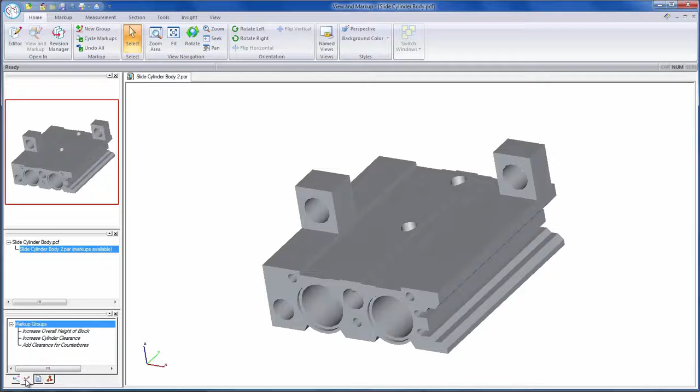Design intent is the intelligence we as designers build into our CAD models so that they'll change predictably. The issue is, in a history-based CAD system, nobody knows what the intent is other than the original designer. This could prove to be problematic if the designer is no longer available or doesn't remember how the part was put together. To illustrate the problem, we've been sent some markups to make to this old part.

For our first change, we need to add some extra material to the slide in order to create additional clearance between features. We have instruction to change our slide body to an overall height of 31mm. The second change is to increase wall thickness between the cylinder slides and the cutout to 4mm, as we're seeing some problems with deformation. And finally, we need to add at least 2mm of clearance between these counterbores, as our new manufacturer is reporting a blow-through risk.

First, we'll attempt to make these changes like you would with most any other CAD system, using a history-based approach. Then, we'll make exactly the same changes using synchronous technology. So first, history-based, and to help compare, let's set a timer going in the top right.

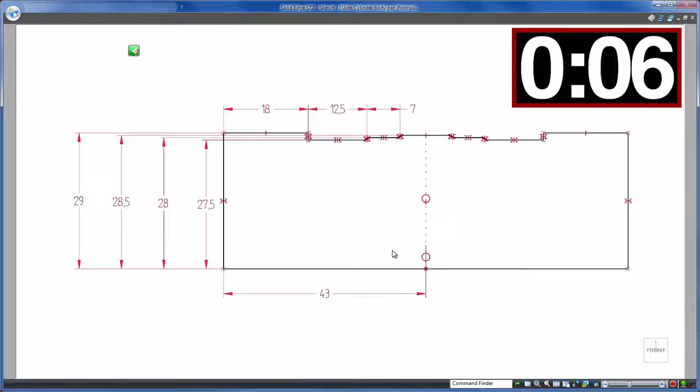So for the first edit, we click on the model to edit the sketch of the highlighted feature, assuming this is the correct feature. Luckily it is, and we're also lucky that we have a fully defined sketch with a dimension of the geometry that we need to change. We'll change this to 31mm as required, the sketch is updated as we'd expect, and then rebuild the model.

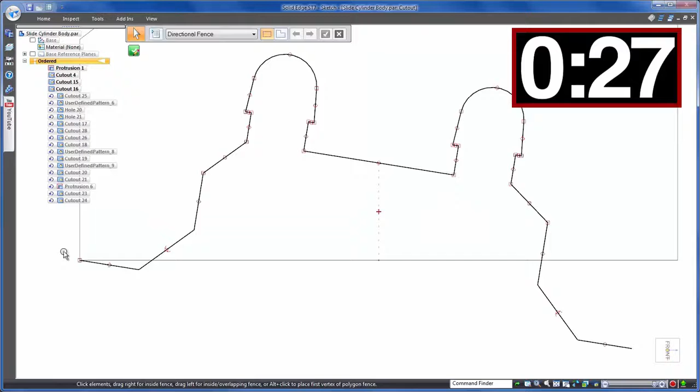We have a problem. Due to inappropriate design intent, this cut on the right has shifted, so we need to go in and fix this by editing the sketch relationships. Only a minor issue there to resolve, 34 seconds of editing, but let's do the same revision using synchronous technology.

Timer restarted in the top right, and for this same change, all we need to do is place the required dimension in 3D, no sketch work in sight. Solid Edge has recognised the design intent of the geometry here. It sees that there are quite a few faces to keep in line.

However, as you can see, we can intervene on the fly if we wish. Solid Edge was right the first time though, and furthermore, notice that we're able to keep the model symmetrical. No issues about fixed origins or coordinate systems, 22 hassle-free seconds.

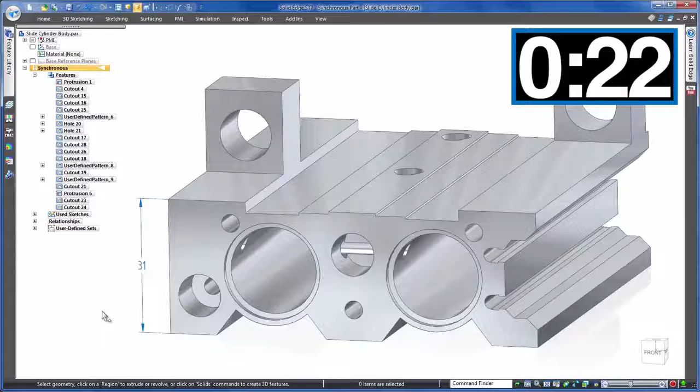Back to history-based for the next change, and before we make any edits, we need to find out how much material we currently have between the cylinder and the cutout. Measuring it finds it to be 2.5mm. We need to make this a total of 4, so we'll add 1.5mm to the radius of the cut.

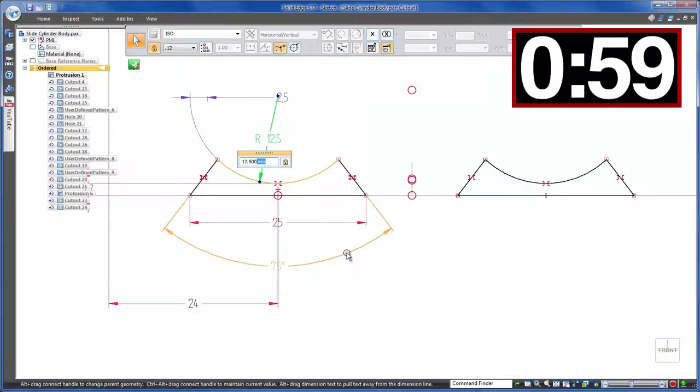Again, we'll go in and edit the sketch of the feature and use Solid Edge's ability to enter equations in the dimension box to simply plus 1.5mm. Rebuild the model and it's clear that the original design intent wasn't set up for this type of change. We now have interference with our slide positioning holes.

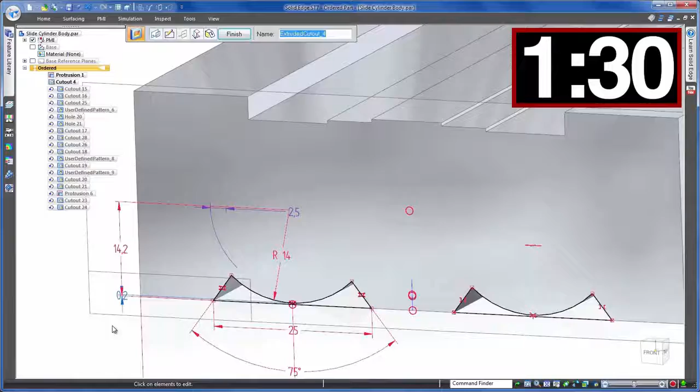So let's undo that change and go back to the sketch to correct the design intent. We'll speed through this to save you falling asleep. Okay, sorted, and we're at 1 minute 34 seconds.

The same change using synchronous technology, and dimensioning the two radii here isn't limited to just taking a measurement. Instead, we can immediately type in the 4mm clearance value required. As for design intent recognition, not only does Solid Edge allow us to add material rather than shifting the cylinder slides up, but it also recognises that we'd want the other side of the model to change too, as it's symmetrical.

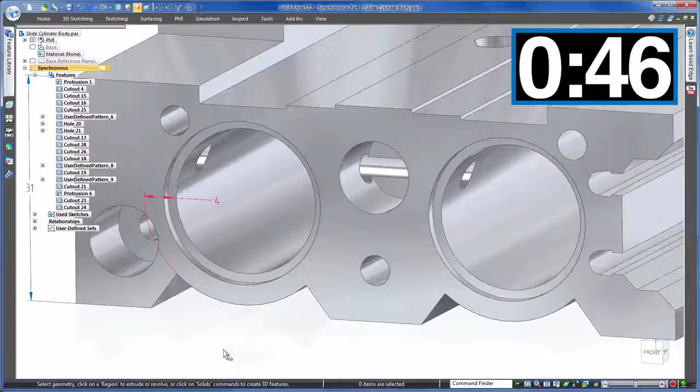Now for our final revision, and back to a history-based approach for the last time. In order to get a better idea of what we're working with, we'll create a section view through the model so that we can get a better understanding of where that blow-through risk is. Okay, here it is. So we'll be editing these two counterbores, and let's take the lower one first.

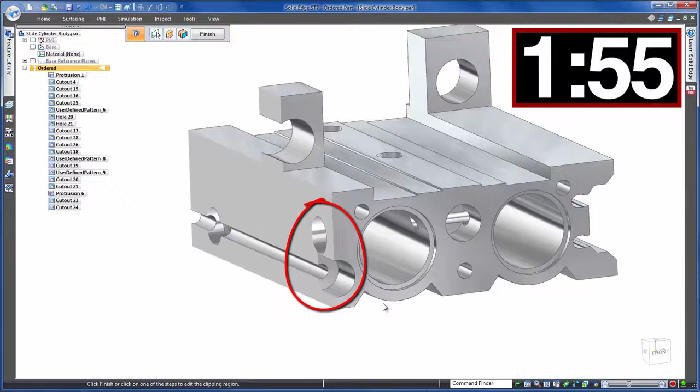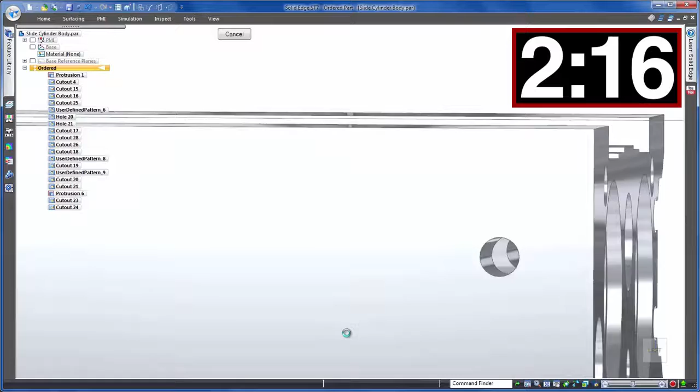We'll go into the sketch and modify the dimension that's controlling its position, subtracting 1mm. Again, we'll use the equation in dimension box method for ease. We need to do the same with the top counterbore to total our required 2mm clearance, but repeating the same steps, notice that this wasn't created in the same way as the previous. Instead, it has two cuts, one concentric to the other.

These sorts of frustrating situations are often run into in history-based modelling. Design intent may not be what you'd naturally expect. It's all down to the original decision and creation. Another fix required.

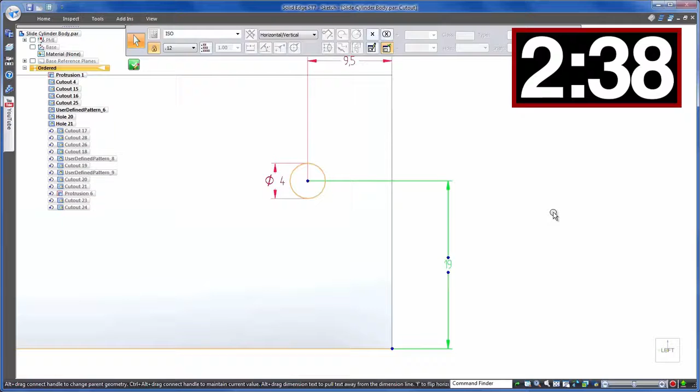Re-examining our part to make sure everything is how we need it. Notice that we now have an issue relating to the rear counterbore. It doesn't line up with the front counterbore we edited earlier. Again, the setup of the original design intent means that the model hasn't changed as expected, so time for another fix. We'll speed this one up too.

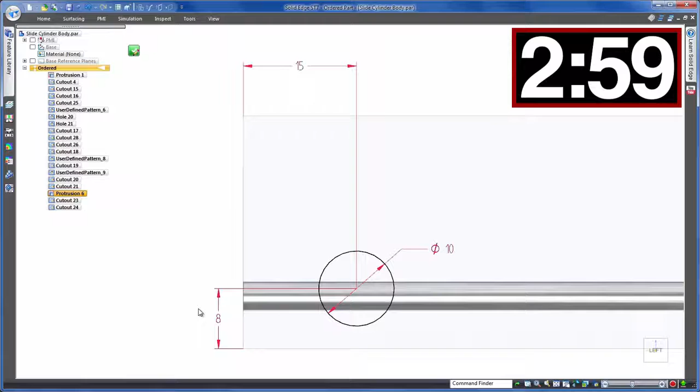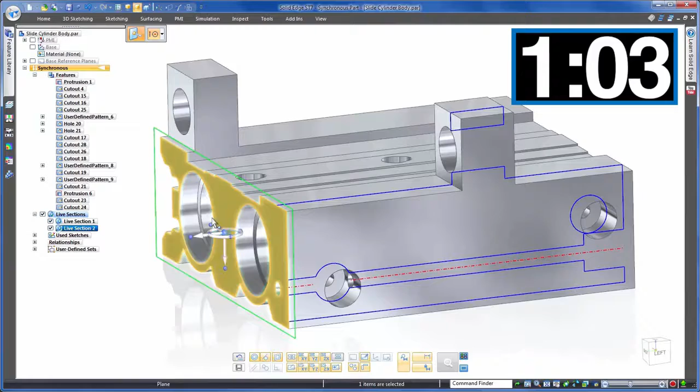And this same final edit using synchronous technology, we'll remember the section view that we used in our history-based approach. Well, check this out. Synchronous technology automatically creates sketches at that particular section, allowing us to use those to drive the model. And as it's that easy, well, let's add 2 sections. We can even hide our part so that we're left with an unobscured view for our required edits.

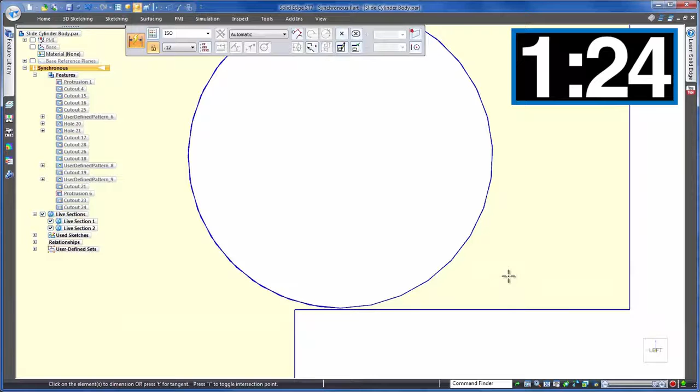We can then simply drag this profile to see how the design intent is being taken care of, which of course is modifying all of the solid geometry in the background, or use precision tools to make the edits. We use the same dimension tool we've been using all along to add 2mm, or round to 2, as we can now more clearly see the overall geometry.

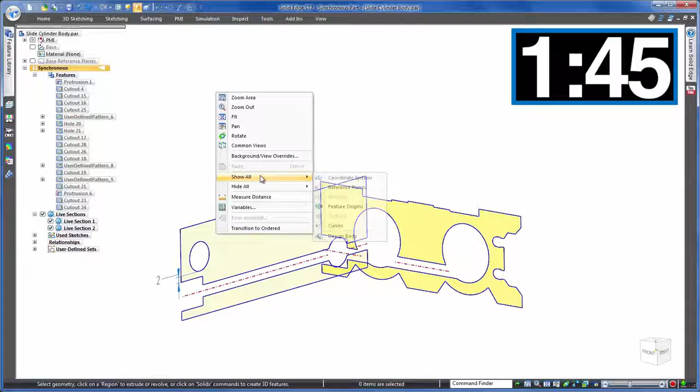But what about that rear counterbore? Well, no problems here. Solid Edge has recognised the design intent of keeping these aligned, and of course you have the freedom to intervene if you wish. All changes done. Let's see how the times compare. 3 minutes 37 seconds for history-based and 1 minute 49 seconds for synchronous technology. Both small numbers for this simple example, but that's half the time using synchronous technology.

And it's not just about time, it's the removal of the guesswork, the tiresome interrogation and modification of the original design intent. Synchronous technology in Solid Edge recognises and maintains design intent on the fly, of course with freedom to change, allowing for sensible and predictable edits.